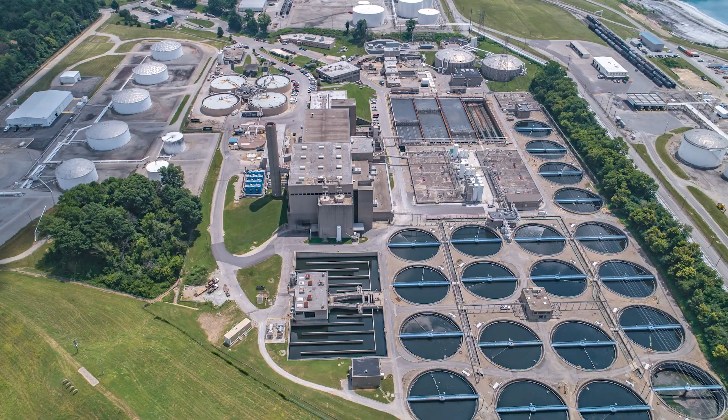MSD, ensuring safe, clean waterways for Louisville and the surrounding region. MSD does more than you might realize to protect the health and safety of our communities, and the work is really quite extraordinary. It is our mission to provide quality wastewater, stormwater, and flood protection services to protect public health and safety. Let's talk about MSD's 3 key services.

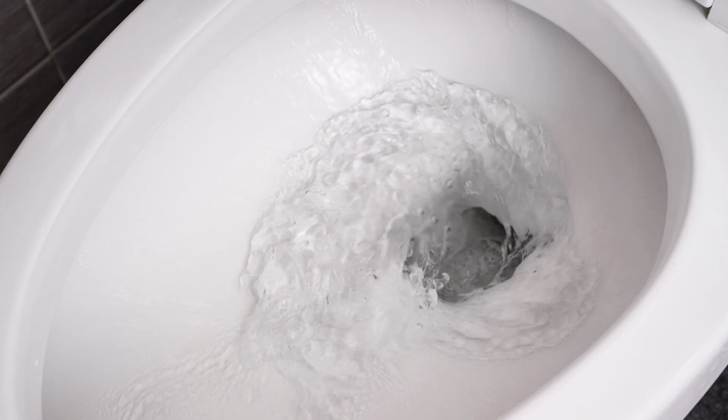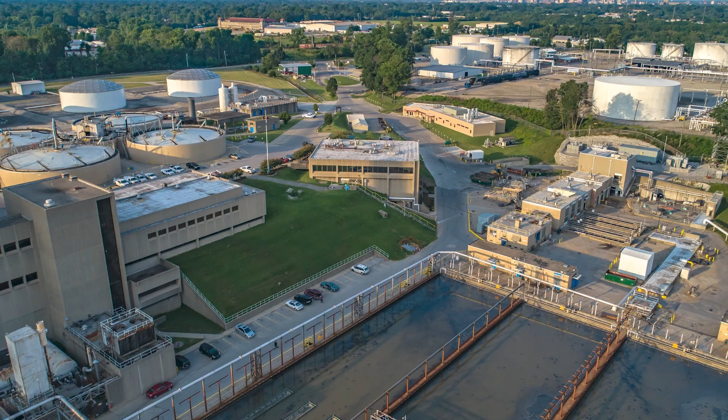First up, wastewater treatment. This is the water we send down the drain from sinks, showers, tubs, and toilets. MSD treats more than 170 million gallons of wastewater every day. Water quality treatment centers ensure that the water meets or exceeds regulatory standards before it's released back into local streams and the Ohio River. Next up, stormwater management.

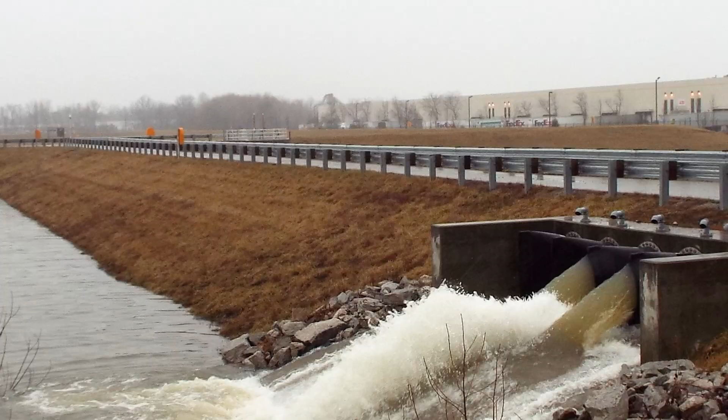What happens when we get heavy rains or after it snows? All of that water has to go somewhere. MSD makes sure the runoff flows into drainage channels to underground pipes that transport water away from homes and businesses and into area creeks, streams, and the Ohio River.

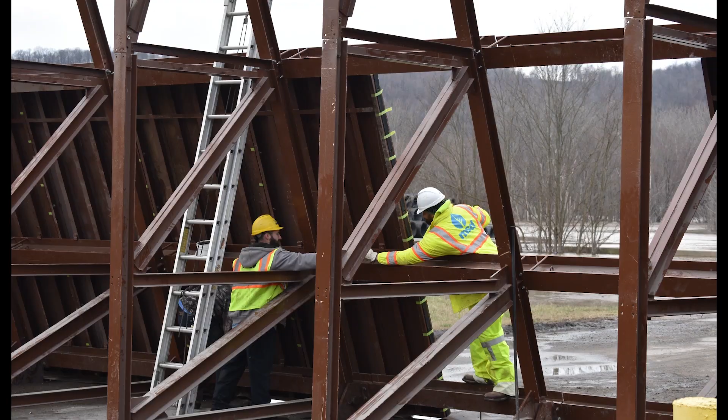Now let's talk about flood protection. MSD flood protection infrastructure includes 29 miles of flood wall, 16 pumping stations, 150 floodgates, and 80 flood wall closures. It all works together, keeping the community safe when river waters rise.

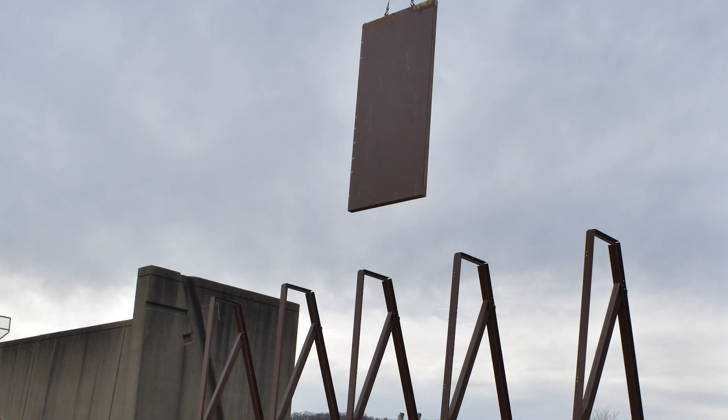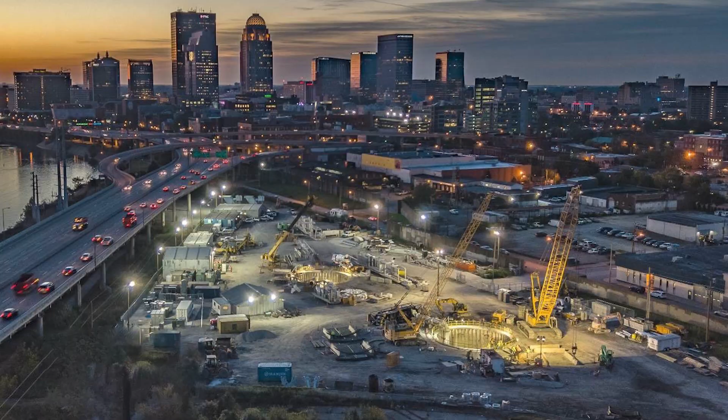MSD also closely monitors water quality within the system to make sure pollutants don't contaminate our waterways. Plus, the innovative technology and engineering of MSD's waterway protection tunnel and underground storage basins further protect our community from dangerous overflows and pollution. There's more to MSD than you imagined, right?

MSD is dedicated to our community's health, a cleaner environment, and a better quality of life for all area residents, today, tomorrow, and for years to come.

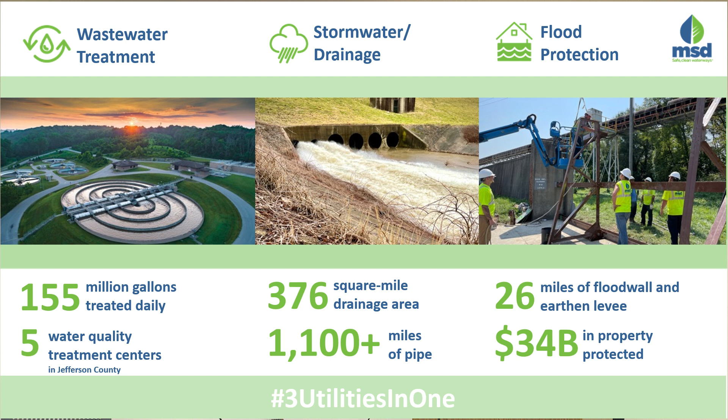So that gives you sort of a snapshot of MSD in terms of what we do with our wastewater system, our stormwater and drainage system, and our flood protection system. All 3 of these utilities are important assets to the community, and one of the things that we've been doing this summer is scheduling public meetings around the community so we could talk a little bit about our clAIRity program.

We created our clAIRity program as our combined effort to help get the message out about odors in the city and to engage with the community, so we get direct information to them and we get feedback from the community as well. This is something where we want folks to either talk to us about an issue, report an issue, or ask a question relative to odors.

You should have the ability to either write your question down or we can address those as we go through. During tonight's presentation, we will also have an opportunity for us to take information from you so that we can investigate. If you have an issue in your neighborhood, just make sure that you get with one of our staff folks and we can communicate with you.

Let's talk about odors. What causes sewer odors in our system? The primary odor that we have in our system is hydrogen sulfide, H2S, and it's a natural combination when sewage or other materials decompose in the system. It is exacerbated obviously during hot, dry periods, mostly in the summer.

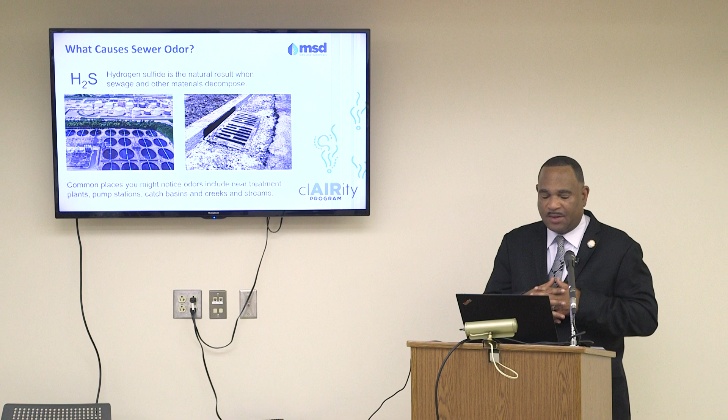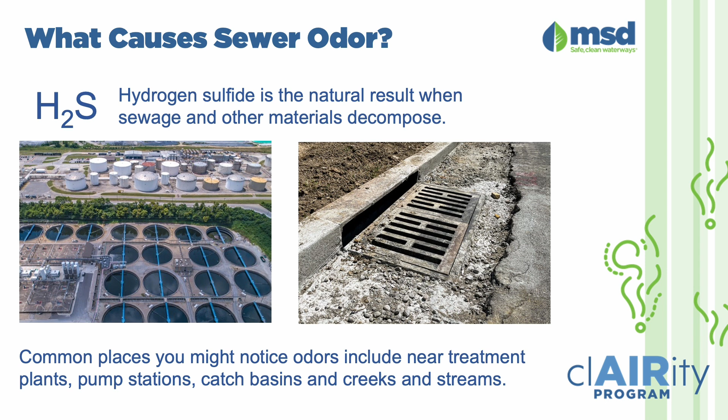We have branded the month of June through October as odor season here. Common places that odors may exist might be catch basins, those things that are along the street when it rains and the water drains in, manholes, wastewater treatment plants, and pump stations. All those different types of locations can be a source or a place where odors can emit from the system.

One of the things that I think is very important is that people understand that there are other sources of odors in our community. There are non-MSD sources such as chemical plants or manufacturing facilities or even a garbage truck or a garbage bin that may be in the community, which can be a source of odors.

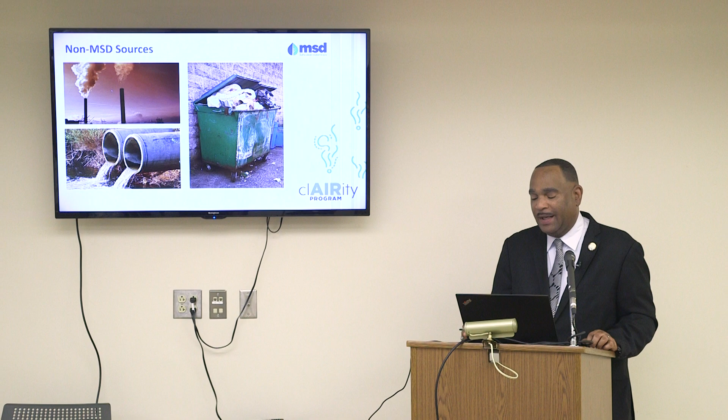So while we work every day to mitigate odors, we don't have any responsibility over private sources of odors. So we want to make sure that when we talk to our community, we clearly understand what the odor is, what it smells like, and whether it's related to the sewer itself.

We do things every day to help mitigate odors at our facilities on a small scale. We use carbon canisters, usually placed over manholes or air release valves, where air is moved through an activated carbon canister and odors are adsorbed onto the carbon. That's a good way of odor treatment or odor mitigation.

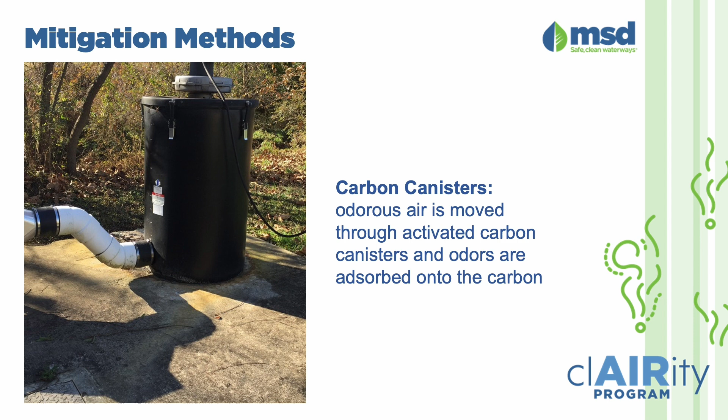On a much larger scale, we do chemical treatment or chemical addition into our sewer system, whether at a pump station, a small treatment plant, or a major transmission line. We add a chemical called bioxide, which is a very natural way of addressing odors in sewer systems. There are other chemicals used as well, but bioxide is a non-hazardous chemical that is commonly added to the wastewater stream to mitigate odors in the system.

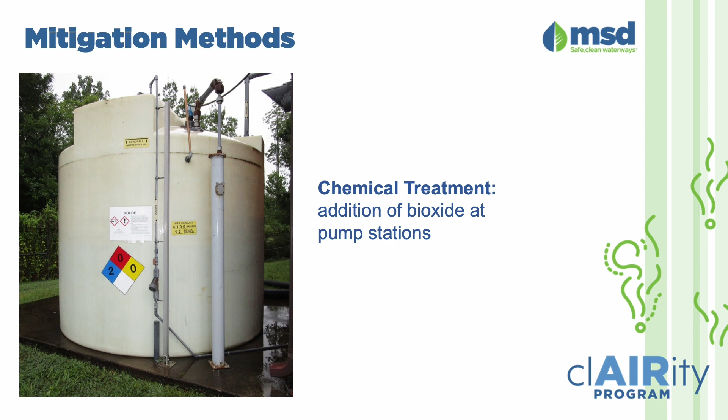We also have biofilters at our larger treatment plants or some of our main diversion facilities. Biofilters are a very simple treatment process where we put the air through wood fiber, wood chips, or large pieces of mulch. The bacteria on the wood chips or mulch can consume the odor compounds, and that helps with odor mitigation in the system.

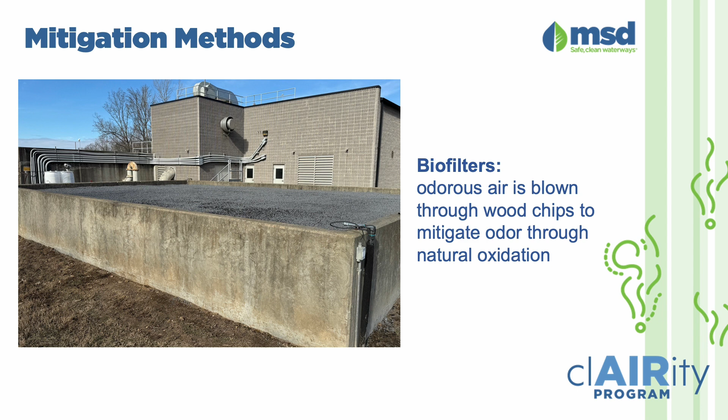At our largest treatment plant, Morris Forman, which is the oldest and largest treatment plant in the state, we use biological scrubbers to help reduce odors. Biological scrubbers are more complicated to operate, with a lot more moving parts than the biofilters, but the premise is the same. Inside the vessels is a bed of media, and living on the media is bacteria. As the odors come through, the bacteria attack that odor compound and reduce the odor.

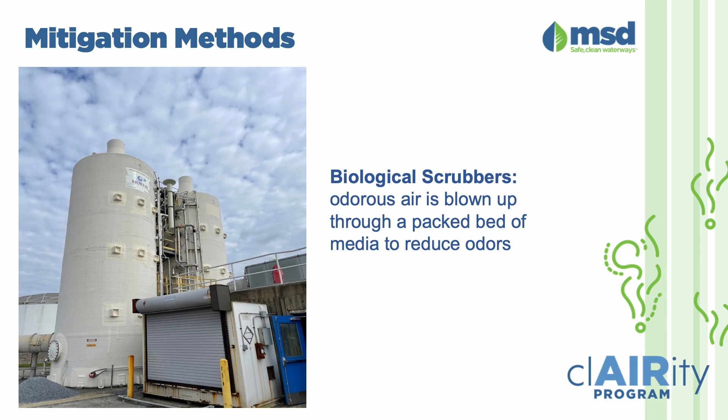Primarily you have these systems at our largest wastewater treatment plants, but there's things we do every day. When we talk about the system, there's a combined sewer system, primarily inside the 264 or the Watterson Expressway. We have 5 major watersheds in Jefferson County that we serve, and the Morris Forman watershed is mostly where the combined sewer system is.

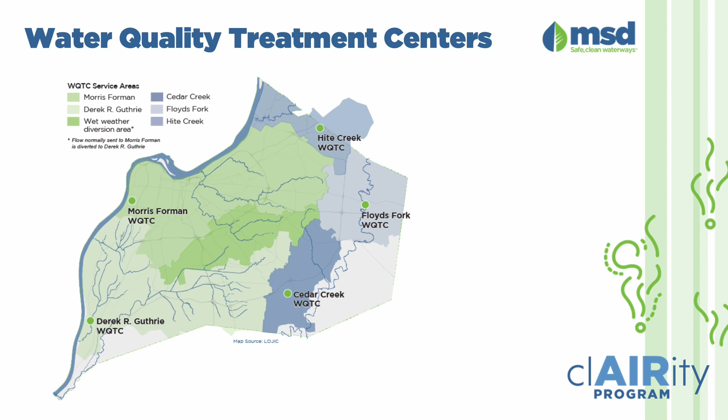With these combined sewer systems, they're very large pipes designed to carry stormwater and waste from businesses and homes, and they're designed to be self-cleaning, meaning we need rain to flush out those big sewers. So when we have periods in the summer where it's real hot and real dry, we have a hard time with odors building up in the combined sewer system.

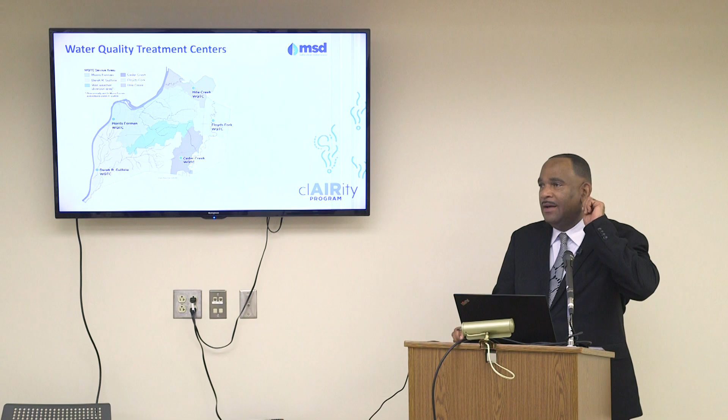The example would be last week. We had a heat wave, right? As soon as it was dry, it was 95 degrees for 3 or 4 consistent days. I think last Wednesday and Thursday we started to see a spike in odors in the system. So there's a correlation between hot, dry, extreme hot and extreme dry periods and odor mitigation in the combined sewer system, which was built in Louisville in the 1800s.

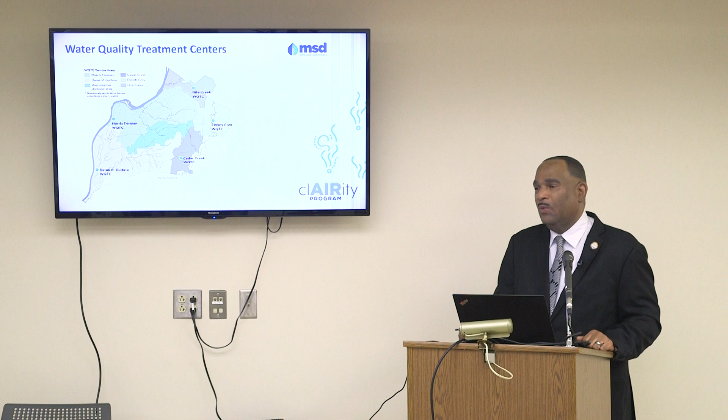In addition to dealing with aging infrastructure, across the nation large urban core cities are battling with odor mitigation because of the shift in climate change in our country. Morris Forman, I mentioned, is the oldest and largest treatment plant in the state.

On average, we treat 90 million gallons per day, but on a rainy day, we have the capacity to treat approximately 350 million gallons per day.

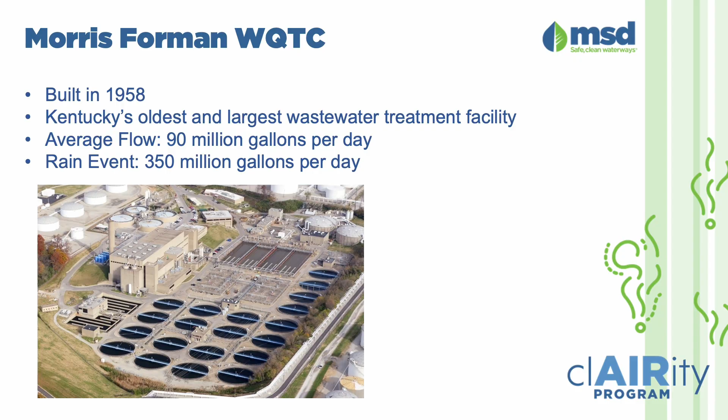We are doing a lot of work at Morris Forman as well. We have a biosolids improvement project that has kicked off down there. That is a $255 million project, and there's about $12 to $13 million of scope in that project specifically to improve odor mitigation at the Morris Forman treatment plant. We know that can be a source of odor, particularly in the west end of our city. That project is underway and scheduled to be completed by 2027.

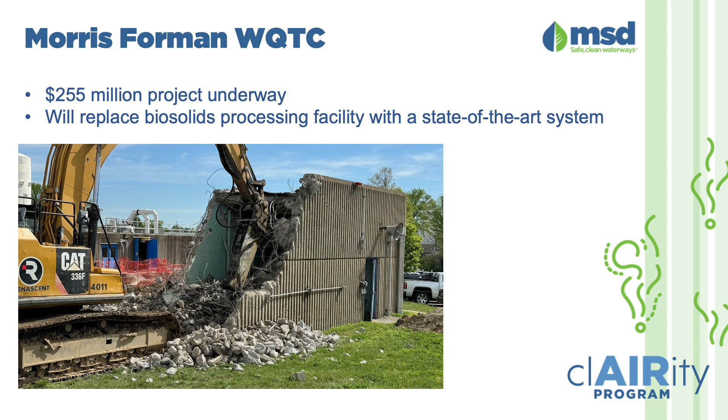So it is a very large project, but the odor control work is going to be done as part of that project. I mentioned the combined sewer system—this gives you a service area map that helps you understand the combined sewer system. You'll notice it's a part of the city that not only has older assets, but is also where Morris Forman is located, in the west end of our city.

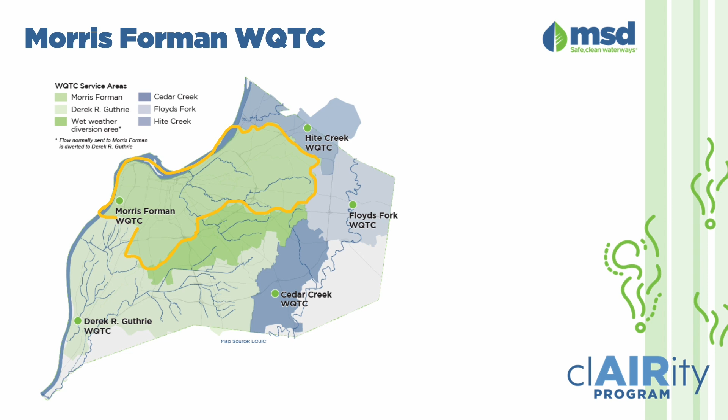We also have assets that we put in as part of our consent decree, the Shawnee Park Basin, the Portland Basin, and other sources of potential odors that we are examining in our community as well.

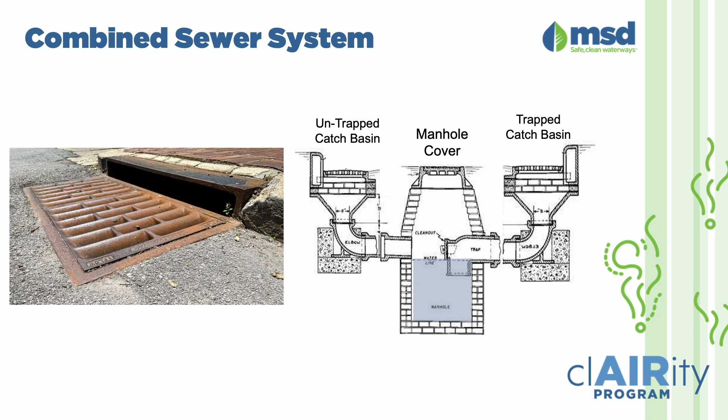In terms of local neighborhoods, we know a lot of odors come out of the system from catch basins. Some are just old, some were not built with the ability to be trapped, some are untrapped, and some are trapped. Some just need rehabilitation, and some don't have proper drain plugs. So our crews spend a lot of time responding to odors, either getting water into the catch basins or identifying them for rehab.

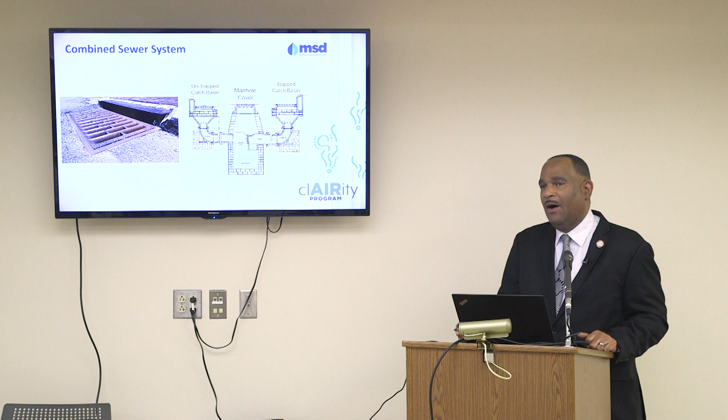We have inspectors assessing a lot of catch basins inside the Watterson Expressway. I think we have approximately 22,000 catch basins inside the Watterson Expressway, and about 15,000 of them are probably in need of repair or rehabilitation. So we've identified 8 specific areas we're focused on in the next couple of fiscal years to address catch basin rehab and replacement.

When you think about a trapped catch basin, essentially it has the ability, it's kind of like the pipe or the gooseneck under your sink at home. It has the ability to hold water, and that water serves as a trap so odors cannot get out of the system if the catch basin is trapped properly.

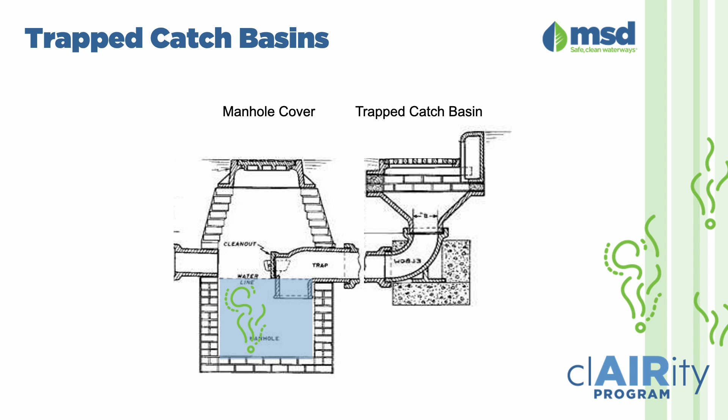We also have trapped catch basins where, during hot, dry periods, the water will evaporate out, so we have to respond, and that's what our crews do. We have several crew members here tonight who respond whenever we get a call. They either introduce water back into that catch basin, flush it out, clean it out, or deodorize it. But even trapped catch basins can be a source, and that's a challenge we're dealing with as well.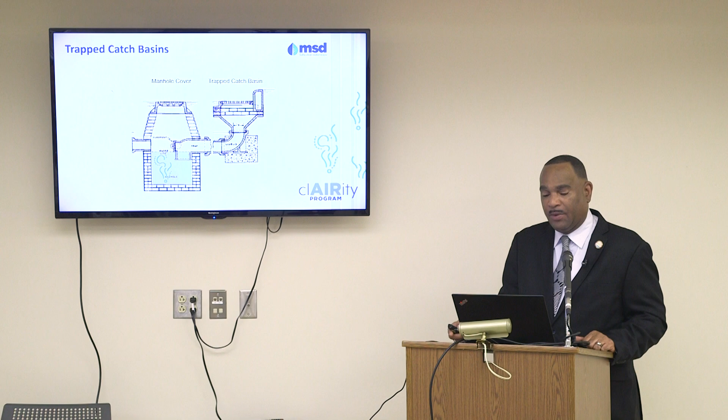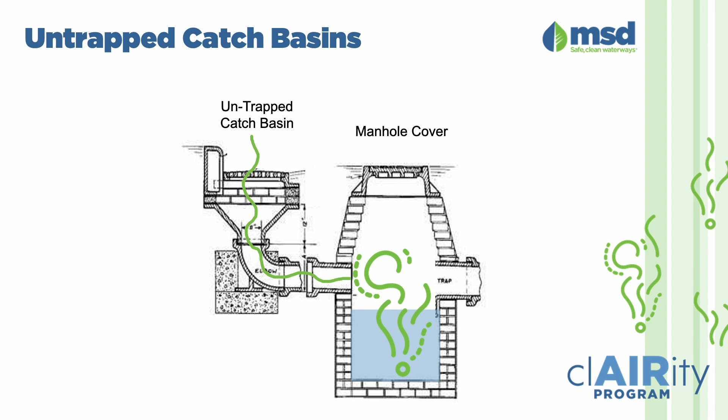If a catch basin is untrapped, it doesn't have the ability to hold water as a trap, so any odors generated in the system are escaping through the untrapped catch basins. A lot of the projects we've identified will either mitigate or improve that catch basin, or completely replace it with a trapped catch basin with the ability to hold water as a trap. In our budget for the next two fiscal years, our board has prioritized approximately $49 million specifically to address not only catch basins but other odor enhancements in our system.

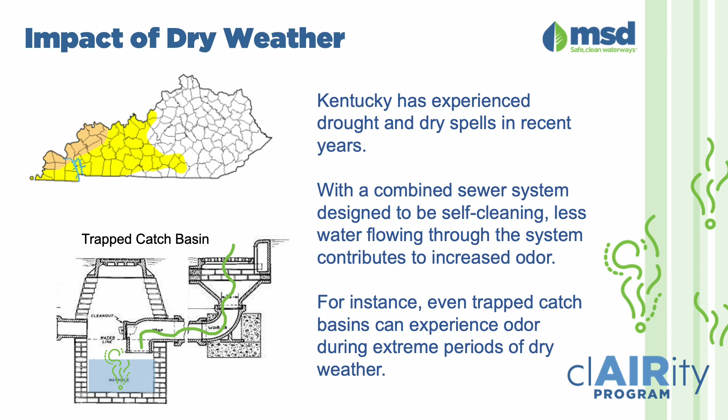I mentioned the impact of dry weather. Today we just came through a rainstorm, which we always like to see because it helps with this issue of dried out catch basins. But we've experienced drought periods and dry spells, particularly last summer and fall, which was a very hot and dry period for us. If you have a combined sewer system, which is designed to be self-cleaning, and you have periods of days or months where it's 95 degrees with no rain, that's a problem in a combined sewer system.

The things we are doing on a daily basis, in addition to the chemicals and biofilters and those type of assets, we are also flushing and deodorizing sewer mains, manholes, and catch basins as part of our daily operation.

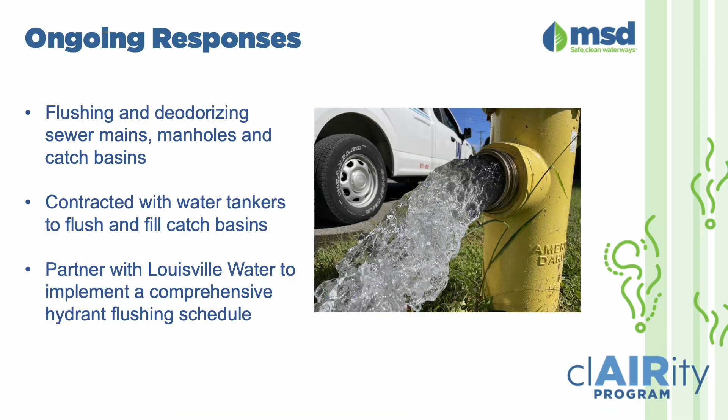We have water trucks deployed within our own fleet. We have a 100-gallon truck, a 300-gallon truck, and a 3,500-gallon truck, and if I'm not mistaken, the 3,500-gallon truck is on the road this week to target those areas where we can get water into the system. We've also put out to bid a long-term contract with a contractor to assist us with getting water in the system.

We are continuing to partner with the Louisville Water Company to implement a comprehensive hydrant flushing schedule, particularly in hotspot areas where we've identified those. Somebody asked me today if we were getting the water free, and I said no, we're not getting the water free, but if you want to take that mission on, you can talk to the folks at the water company. It is a good partnership that we have with them.

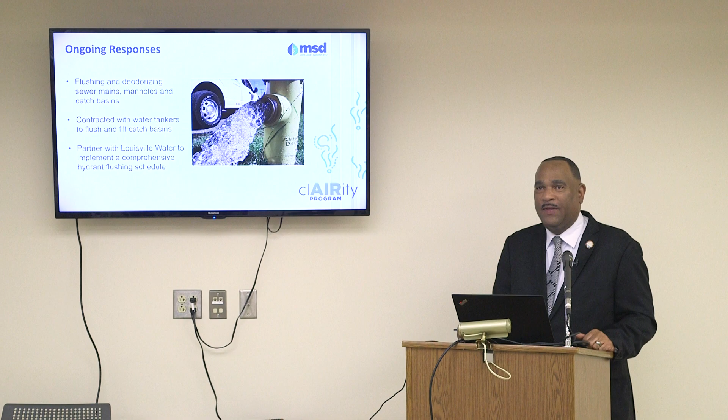So that exacerbates the whole issue of climate change and hot, dry periods. We're getting more solids, but we're not getting more water to help flush those solids out of the system.

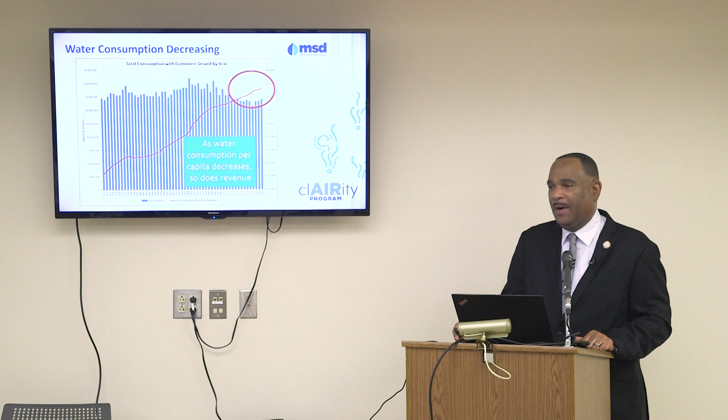So even though we're not just sitting and waiting for it to rain, we always believe in a combined sewer system that rain is a very good remedy. For example, when we get 2 inches of rain, we know that generates about 2 billion gallons of runoff in our system, and that flushes the combined sewer system. So when we look at the daily consumption of our water service area compared to 2 inches of rain, it's always going to be more effective for us to get the rain that we need periodically.

Up until last week, we were getting those periodic rain events and that really helped out. As I mentioned before, we really didn't start to see the odors picking up until last week. The rain we had yesterday and today is obviously going to help with some of that. But we're not resting on our laurels.

Kim Reed, I'll give her a shout out. She is the internal odor guru who's going to be working with our strategy and with our operations teams that are responding, because we take it very seriously, and that's why we're having these meetings. We're not running from the issue. We want to know where the problems are, and we want to be proactive and responsive.

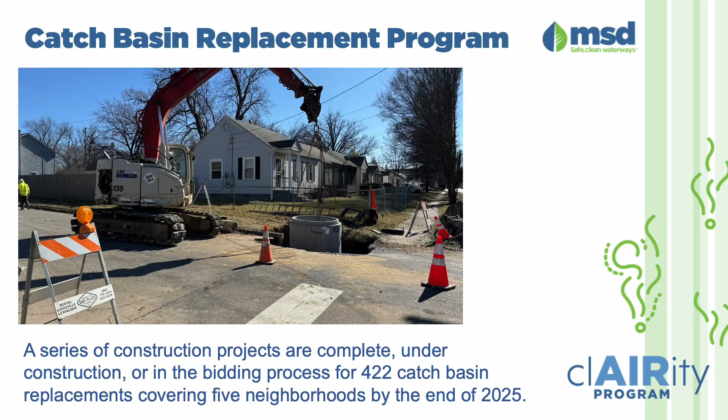We had a meeting last night in Old Louisville, and I asked the crowd how much they think it costs to replace one catch basin. I don't think anybody had an idea. Right now it ranges anywhere between $15,000 and $20,000 per catch basin. So when you think about the 15,000 or so that we have to work on, it's work that we've got to phase over time. It's very expensive for us to do this work.

But we are committed to do that, and we have projects across several neighborhoods in Park Duval. Actually, the catch basins identified in Park Duval are complete. We have completed that catch basin work. We're also still monitoring the odors in the Park Duval area, because we know that even a trapped catch basin can dry out.

We have a total of 202 catch basins where that construction is estimated to be complete in May of '25. In Taylor Berry, we have approximately 54 catch basins, and that's going to be out for bid next month as well. And in the Russell neighborhood, we have several phases that we will be doing.

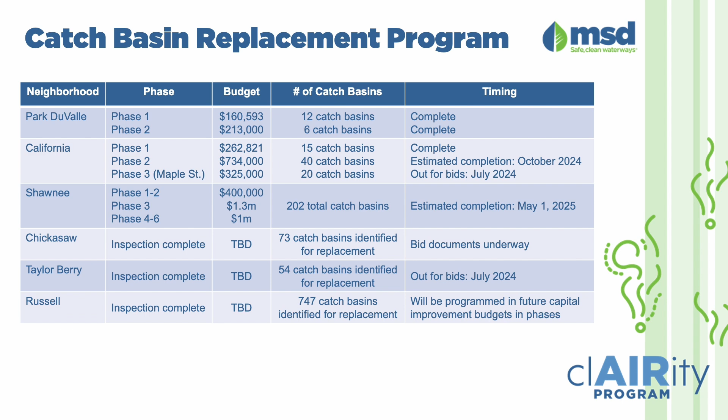There are 747 catch basins identified for replacement, and we'll be phasing those out over the next several fiscal years. We still have other neighborhoods to address. Last night we were in Old Louisville, and they wanted to know where they were on the list. We told them we'll be assessing catch basins there, and doing ongoing work as part of our reconnaissance in the downtown business district as well.

The other thing I'll note is that some of the projects we're doing, whether capital or emergency projects, if we identify that a catch basin needs to be replaced as part of those projects, we're doing change orders and replacing those catch basins as we go through.

A lot of times when we get calls from the community, we ask them where the odor is coming from. Often people don't know that in their homes there could be sources of odor from their bathroom sink, their wash sink in the basement, or their floor drains if they aren't trapped. If there's odor in the sewer pipe and you don't have trapped basins within your plumbing, odors can emanate through your internal plumbing as well.

Our primary focus is on the odors coming from catch basins, manholes, or the streets — that's where our first priority investments are. We try to coach and advise folks on how to deal with odors if they're coming from, say, a floor drain, tub sink, kitchen sink, or even a roof drain from their property, so they can identify where that odor is coming from.

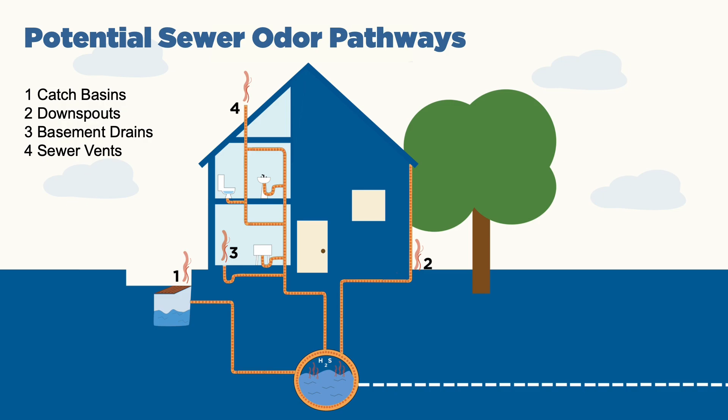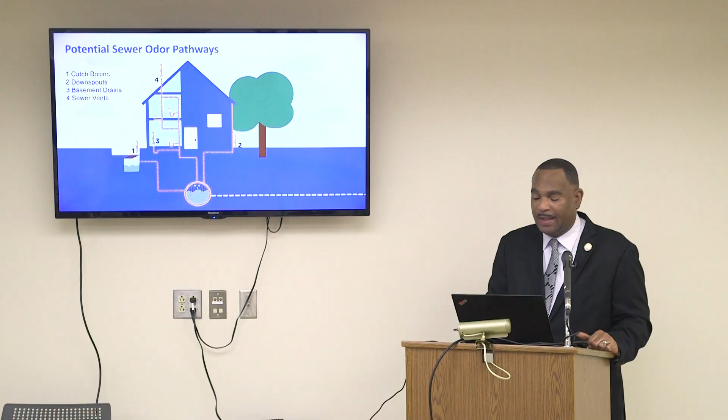Hydrogen sulfide is a natural odor, and while odor is inevitable and part of what we do, we work daily to manage and minimize odors across our system. There are also residential mitigation measures in and around the house that can help reduce odors. Our employees are here to respond, but also to assist folks who have odor issues.

Our clAIRity program has 5 meetings scheduled this summer, but we're also getting invites to other meetings, and we're spreading this message all over the city. There's an op-ed in the Courier Journal that will talk about some of the operational things we're doing in terms of odor mitigation.

We encourage folks to call us if they have an issue — we want to know about it. The number is 540-6000. They can also go to louisvillemsd.org/odor, or use the Smell My City app to get information, and we pick that information up as well.

We have upcoming meetings this summer. There's a meeting on August 27th at the Shawnee Library on West Broadway, and a meeting in October at our central maintenance facility off Commerce Center Place, which is off Cane Run Road. We also have one in October at the Norton Healthcare Goodwill Opportunity Center, 2820 West Broadway, which will be during the day at 1 o'clock so we can catch a different demographic of folks.

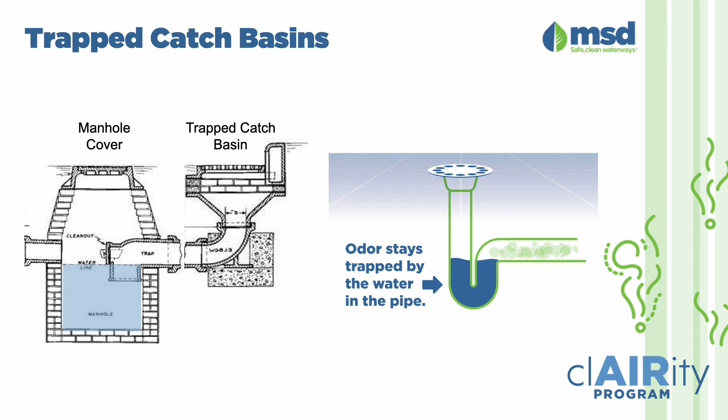Any other questions or comments?